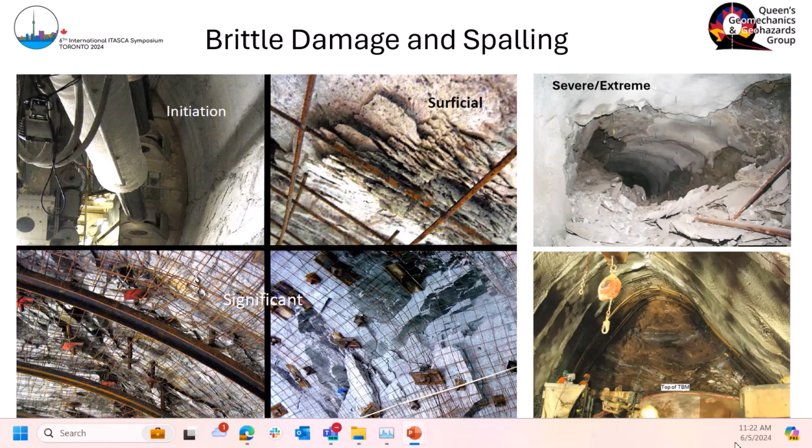But it fundamentally starts with some sort of a way of generating an extension crack in compression. And the classical model for this, way back to Griffith, was the shear flaw, which could move in compression, generating singularities and creating a crack. And we make that big leap from that model to what we see as visible, macroscopic, excavation scale spalling. And how do we get there?

You first obviously have to start at the grain scale. So you can see some scaled pictures here of extension fractures starting from some sort of a shear flaw on the left - it's fairly obvious. In the middle, it starts to cross grains and the actual fractures become longer than the flaws that created them. And then eventually, we sort of skip a step because we don't see it happen, but we can see this excavation scale fracturing.

So the challenge back in the early 90s was how do we sort this out? There was a lot of evidence that it was happening, a lot of lab testing, particularly at the URL in Manitoba and other places, South Africa. But what's the process here?

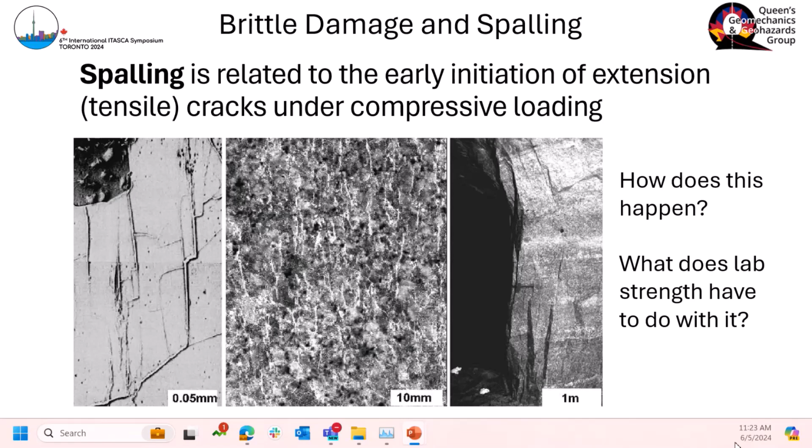Fast forward, we have all sorts of ways of creating what we might call brittle damage models, either with continuum models, simply playing around with the plasticity parameters to fake brittle fracture, or we can go to something more like UDEC, a discrete element model, to create brittle damage propagating through. The yellow in that model, the middle figure, is actually extension or tension, and only when you get farther out into the confined rock mass do you induce shear. We also have complex models to look at interactions between structures, bedding, and brittle fractures in different rock types.

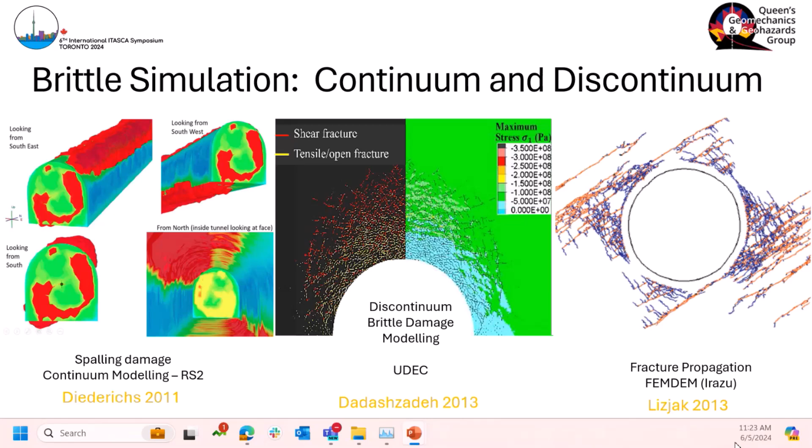These all look great, and they all seem to simulate something. But if you've ever seen Wizard of Oz, you know that the first part and the last part of the movie are in black and white, because things are simple in Kansas. We have time to think and figure out what's actually happening, right? And that's what we used to do, we used to think about the physics of the problem.

But now we're into this... how do we get rid of that? Well, that's going to be a problem. How do we get rid of that thing on the bottom?

Oh well, okay. So now we're into this world of colorful modeling, and the big question is: is it real?

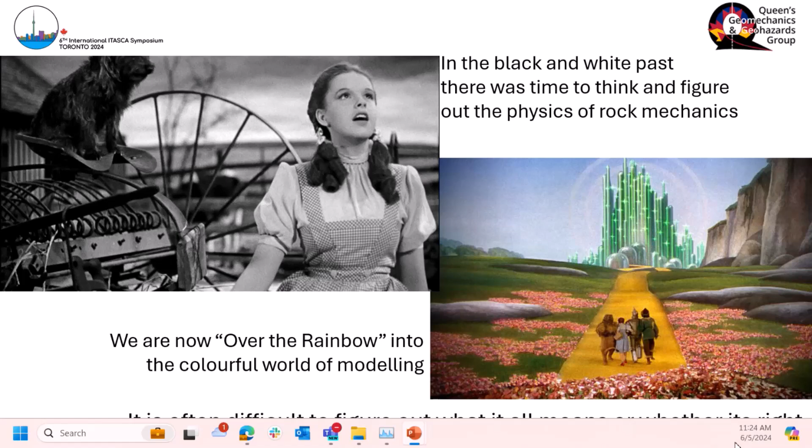So if we go right back to the beginning, Griffith was actually an aircraft engineer trying to figure out why windshields cracked on aircraft, and he came up with the idea of the inherent flaw, both in tension, which was later extended into compression. The idea is that this flaw in tension starts to pull apart, you get singularities at the ends, and they propagate. The longer the crack, the bigger the singularity, the more the crack extends.

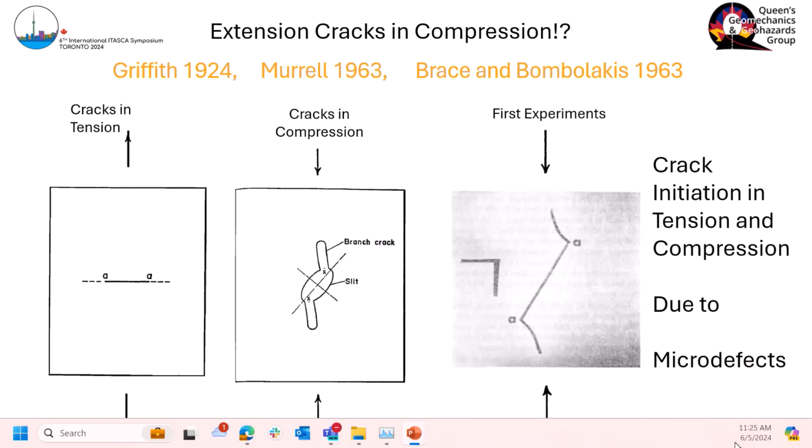So this tension crack would extend. If you think about it in compression, you have to drive some sort of shear mechanism to create those singularities, but the physics is very similar. So in tension, that's going to be very annoying... I don't know if there's any—oh, there we go, okay, got it.

So in tension, I often used to say first crack wins. It's actually quite easy to figure out when damage begins and ends in a tensile situation, because of this idea that the longer the crack, the less stable it is. It's an unstable crack—as soon as you induce the first crack, the system will break.

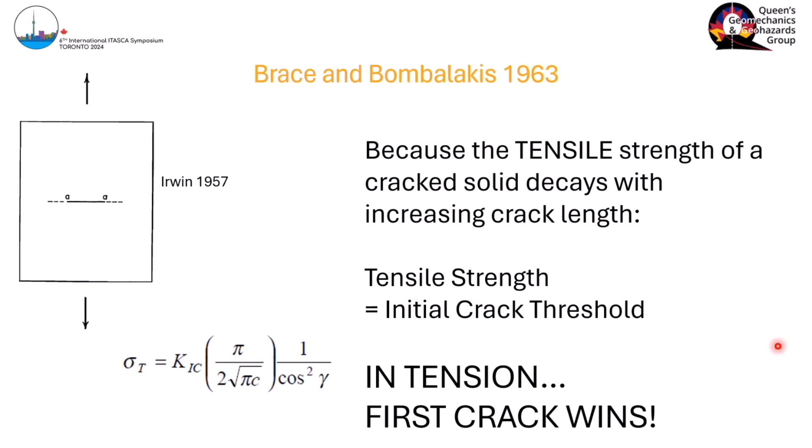Now, following on from that, this shear model was also good in compression to predict when things start. But if you do the math on any of these models, you find that the cracks stop very quickly as soon as they enter, because the world is in compression, sigma 3. You have extension deformation, but the world is still under confinement, and as soon as these cracks go off on their own into the world, they stop pretty quickly. So that's a problem.

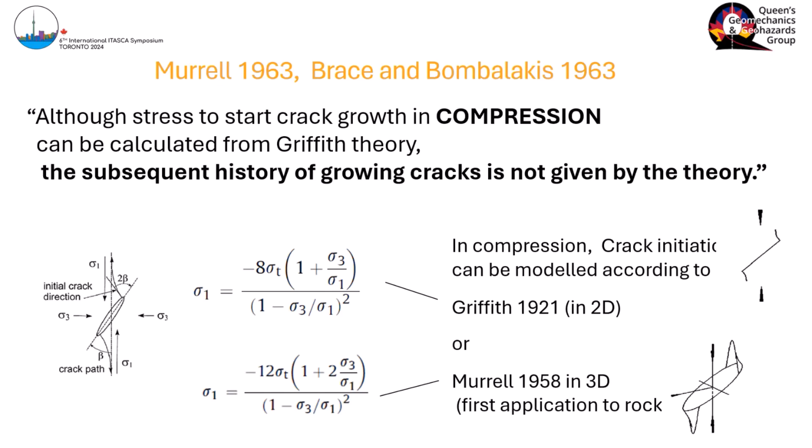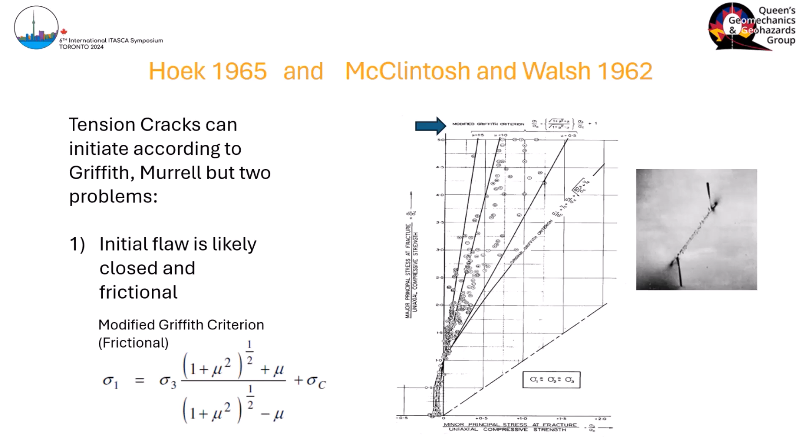What's wrong with this model? Things got even harder when we attached friction to these cracks. The original Griffith crack was open, but of course cracks are closed, so if you introduce friction, things get even harder to break and propagate. It quickly becomes apparent that the only way you can propagate fractures through a confined medium is if these cracks interact. So this whole simple idea of fracture mechanics starts to get very complicated—the first crack is only the beginning in this case.

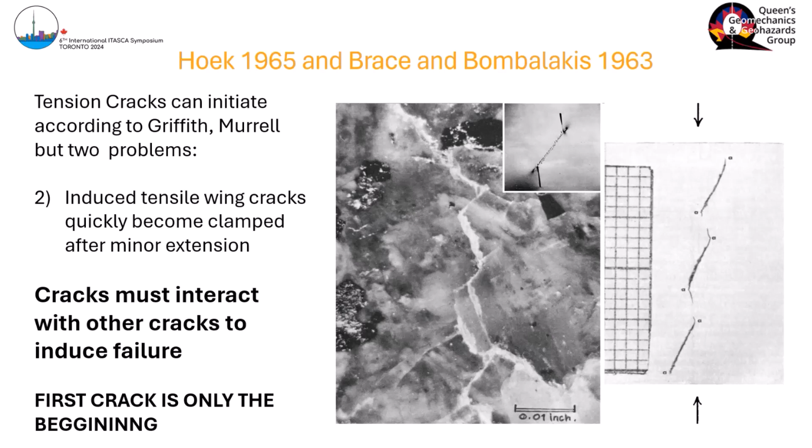But there was some hints of progress. Brace, Paulding, and Scholtz published some great data back in '66, which I think is the last time, showing that the onset of lateral dilation in moderately, reasonably slow loading happened at about half of the UCS, a little less than half the UCS. That's very familiar to most of us now. It had a slope in confining stress, axial stress space, sigma 3, sigma 1, whatever you like, which was non-zero. It's hard to imagine that this was actually frictional, but perhaps it is—you can see that looks very much like if we do lab tests today of any kind, we get the same relationship for the first onset of dilation.

But as we know, in the test it keeps going up to peak. Those cracks can't really fully damage the sample. We can record them through AE, and we can record them through strain measurements.

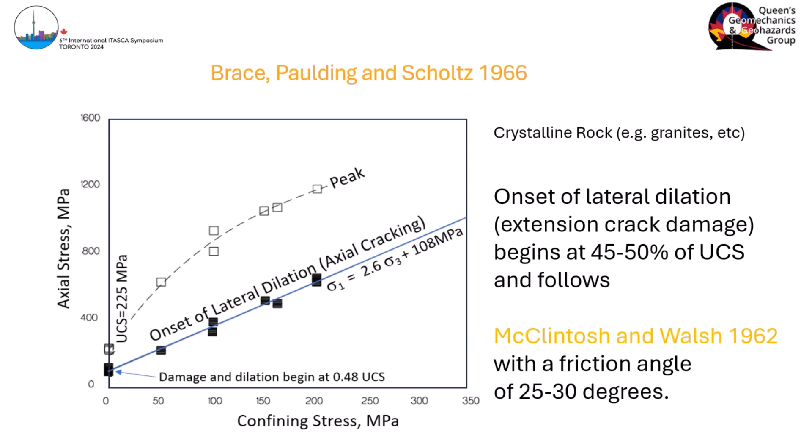Evert Hoek and others did some experiments to show that in fact this idea of crack propagation, which is key to these cracks going anywhere once they start, is extremely sensitive to confining stress—so sensitive, in fact, most models don't really have enough detail and gradients in this regime to help us. But you get the idea: as sigma 3 over sigma 1 drops, or sigma 1 over sigma 3 increases, down to, in this case, sigma 1 over sigma 3 around the 10 to 20 mark, only then do you get cracks propagating any distance beyond their initial dimensions. And that's really critical to how fractures work.

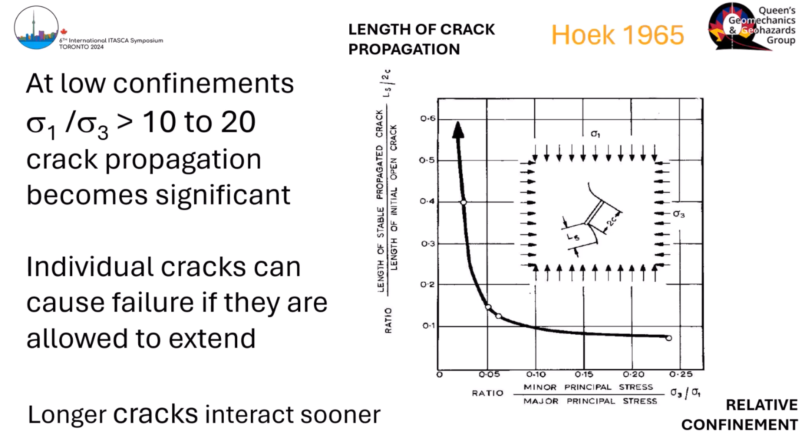This is not the same confinement dependency that was developed by Mogi through lots of triaxial testing. Mogi's line is actually also important. It was an empirical line based on how tests behaved, but if you run it through with reasonable values of Poisson's ratio, you realize this line marks where extension fractures can occur, on the left side of that line and above it. There's no extension strain on the right side, just from elastic theory. And if you have no extension strain at all, everything's moving inwards, you can't create extension cracks, period, even small ones. So this is the dividing line between truly ductile, strain hardening, shearing behavior and brittle behavior.

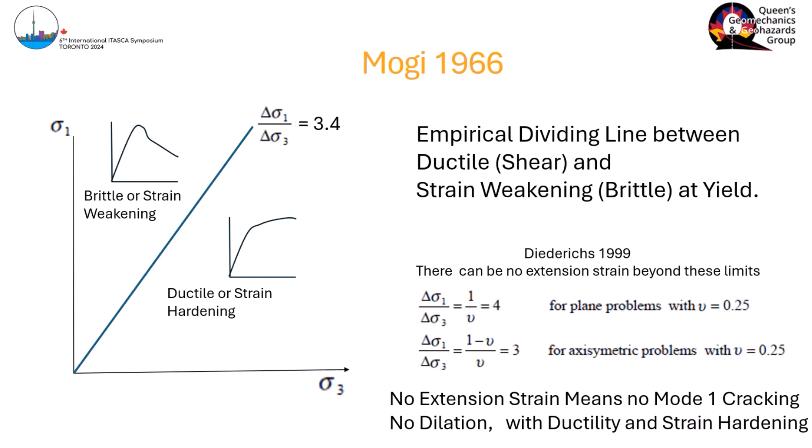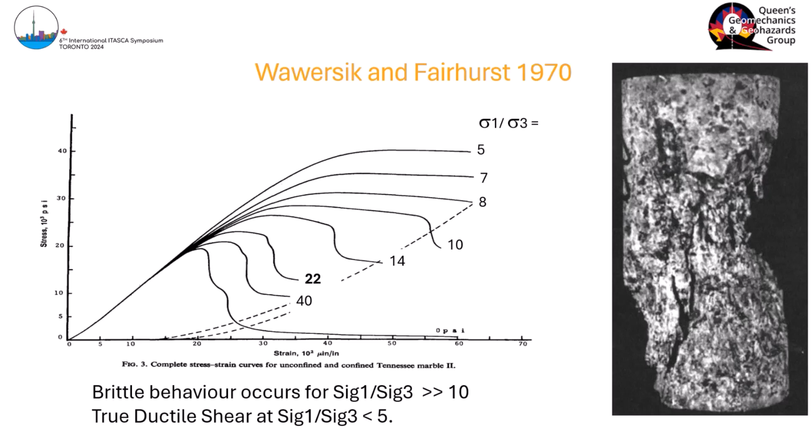So you have these two thresholds, and you can see them here. The Mogi line, if you will, with sigma 1 over sigma 3 less than 5. And this Hoek line, when you start to drop below 10 to 20 in one case, above that 5 line you have purely shear behavior. This is the stuff that soil mechanics is based on. Without these three gentlemen I just mentioned, we'd still be pretending that rock is soil and just making the numbers bigger. But that's the soil behavior. In between, you have extension cracks coalescing to form shear cracks, and then below that, you actually have this brittle fracturing. That lets us divide the world nicely up into true tension, spalling, tension cracks leading to what we'll call shear zones, and then pure shear past Mogi.

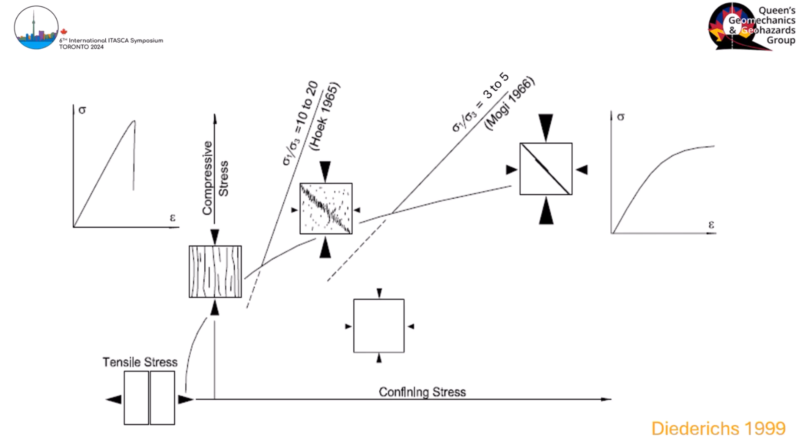So this is the beginning of understanding the world of fracture, and thanks to a lot of good work in the past.

Dr. Fairhurst doesn't seem to be here this morning. Had some nice drinks with him the other night. We talked about this.

You can see here in these wonderful graphics from this paper that the fractures begin on the external edges of this, in this case, the cylinder. The center is actually functioning in that shear mode throughout, and then eventually it just gets too much and you have final fracture. So this is one of the more significant figures in rock mechanics, in my opinion, this process that now we take for granted.

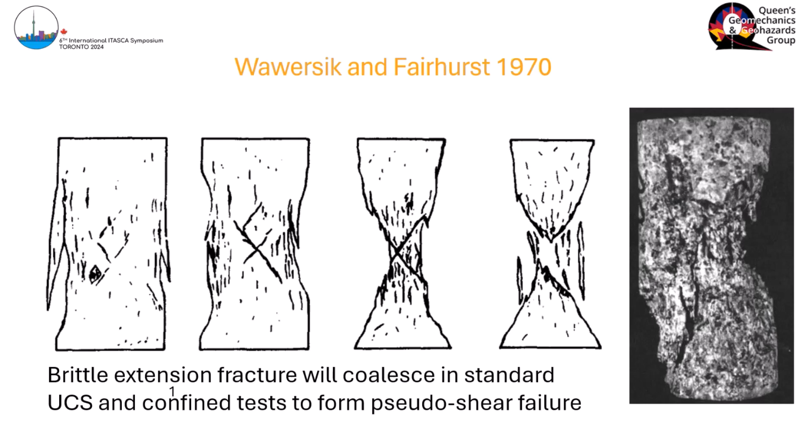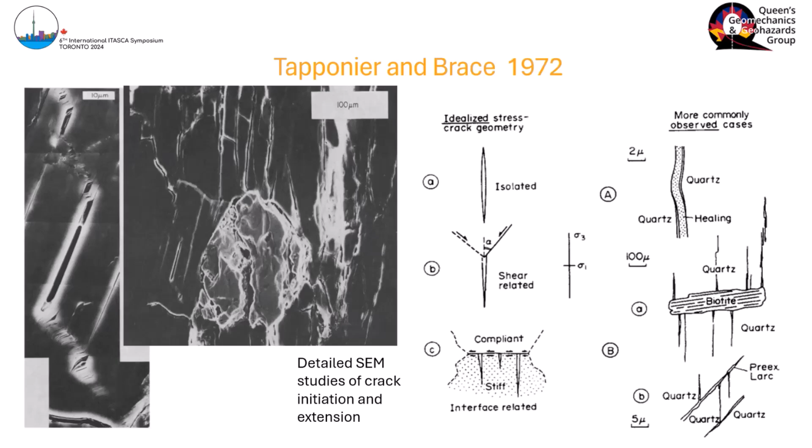This is a great paper that showed that this idea of shear cracking leading to tensile extension didn't need a shear crack. Anything that causes any modulus contrast, any sort of compliance issue, indentation within the sample, anything that can create disturbance in the force, as it were, can lead to extension cracks. So heterogeneity is key. In the same paper, they identified, I don't know if this is the first time, it's the first time I found it, they identified this onset of dilatancy in a test, confined or unconfined.

At some point, the linear behavior, the linear axial stress-strain behavior starts to go nonlinear. And then, of course, you have failure in post-peak. They describe it this way: you have initiation from multiple sources, short isolated cracks. Those cracks cross grain boundaries and start to interact. And then finally, it becomes so much that you have a macroscopic shear process. So this, a long time ago, with physical reasoning, was the basis.

Okay, I'm frozen. Yep, I am frozen. Wait. Maybe just—oh, what the heck? Hang on, let me just try this one. Oh, it's because I'm—nope, no idea. Hello, okay, here we go. Next. Nope, didn't work? Nope, wait. Can I just get out? A sec? Here we go. Use arrows. Okay, thanks. Is that going to work? Yeah.

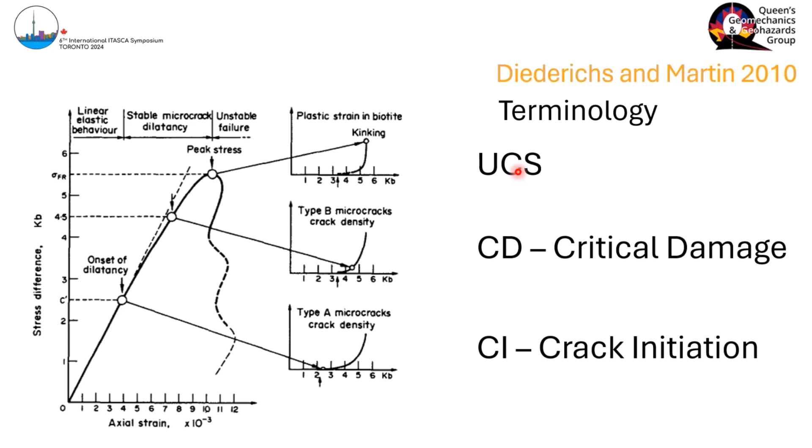So coming back to this idea of these thresholds, which are now sort of ubiquitous, and we test for them and have lots of discussion about them. It's basically the first point where you start to get extension cracks within a compressive field. Those then extend. Once they extend beyond the grain boundaries in a crystalline rock, at least, for example, they start to control their own destiny and they start to interact with other cracks. And that's when things really get interesting. And in some cases, that's when your sample fails.

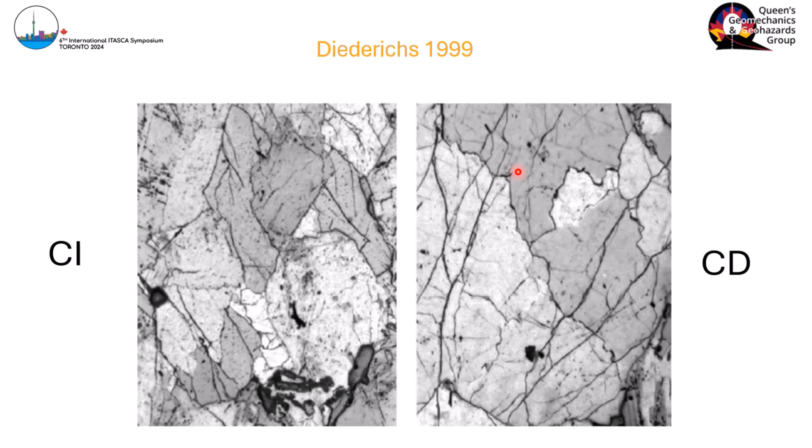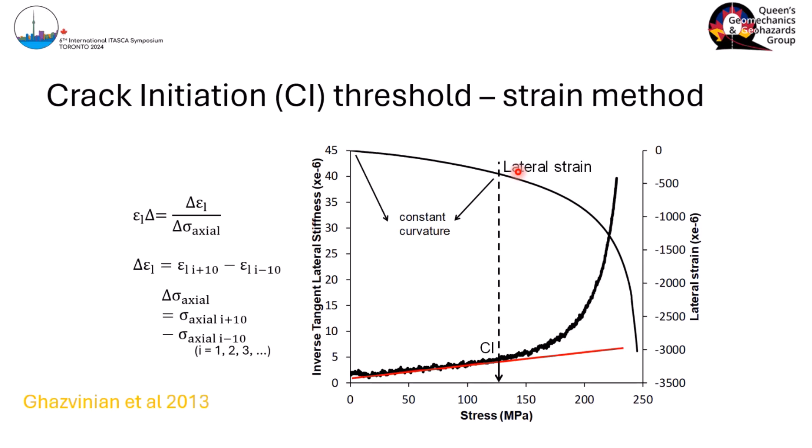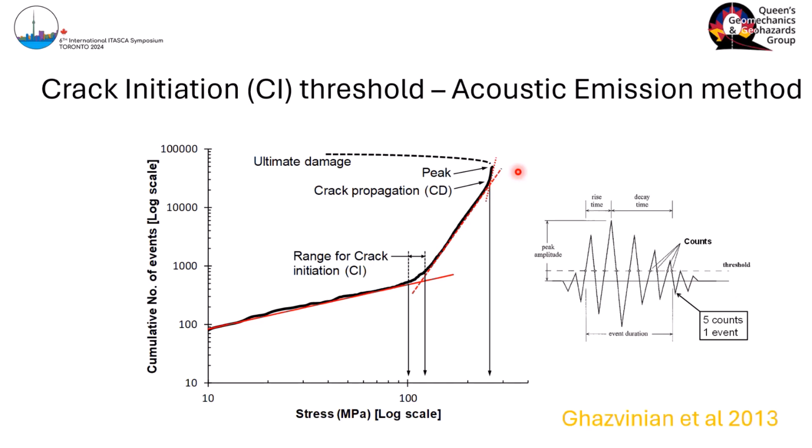That's usually the best you can do in situ in any sort of term beyond a few minutes. After that, anything that happens after CD is really a function of the testing or the constraints. And we can test for these things. I won't get into details here, but with all sorts of acoustic and strain sensors and extensometers and whatever, we can look for deviations in the lateral and axial strains to try to identify these thresholds, which are part of the strength model. Acoustic emissions have been very successful. So these are just ways we can get inputs into models, and we have some empirical basis for all of this. This is a work that just appears everywhere.

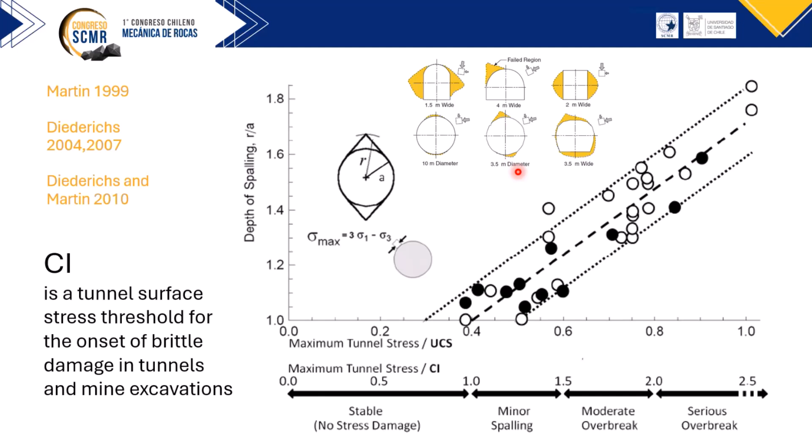These are a bunch of case studies done in the 90s out of the GRC in Laurentian, but the case studies are international. These are cases where people went into where rock had failed and excavated everything they could back to the truly intact rock. So this is kind of a maximum damage, and you can see it begins at about 40% of the UCS, but more importantly, it begins at CI for most rock masses. So this is empirical evidence, and you can track the damage, going to the point of: something interesting is happening here that doesn't follow the normal rules of plastic modeling and so on.

So modeling history that helped this all happen, of course. This is not the first program developed to analyze stresses, but it's probably the first one that people could use. It's an elegant boundary element stress model, about 4 pages in the back of Hoek and Brown, 1980. Of course, he used pen plots. That computer there is actually what I started working on in my research.

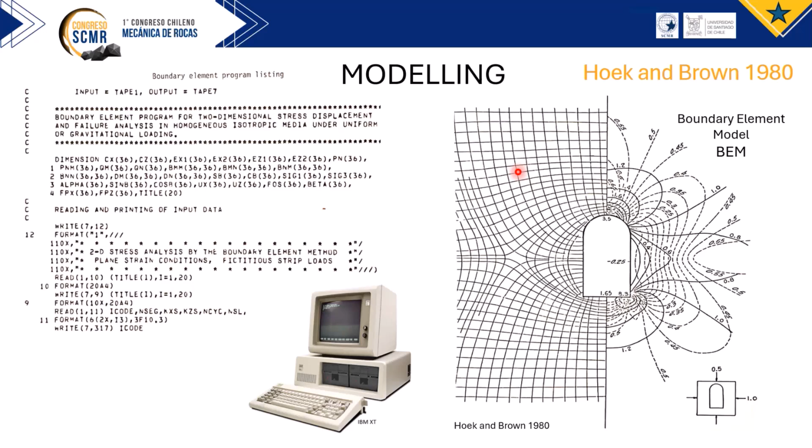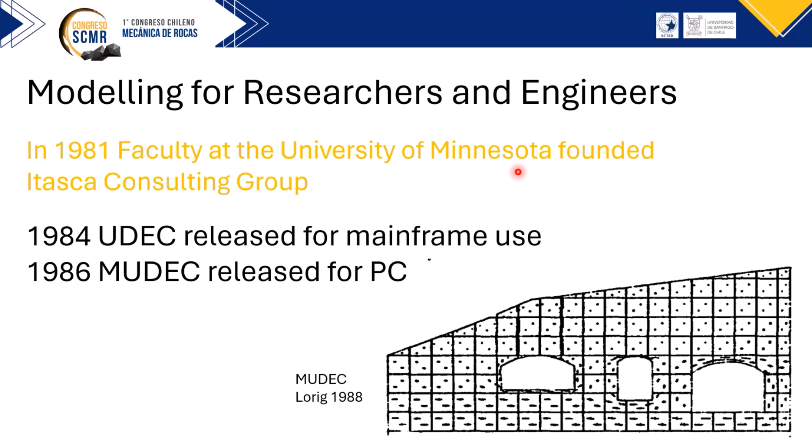And of course, around the mid to late 80s, Itasca started releasing commercial packages. I don't know if I've got these dates right, but I remember the floppy disk of MUDEC showing up in the lab, which then became UDEC later. UDEC was around as a mainframe program. FLAC and 3DEC came a little bit later.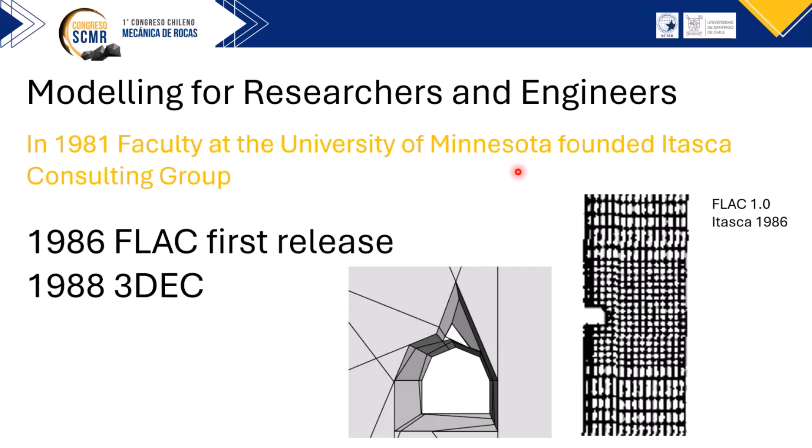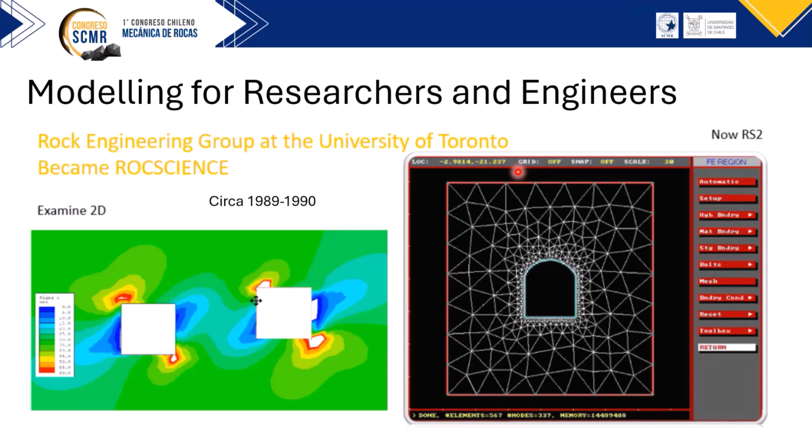This was the beginning of usable models for geomechanics and rock mechanics, and even soil mechanics, really, coupled with work at U of T happening around the same time, bringing boundary elements and finite elements to a point where normal people could use them. This was a big boon for graduate students, because you no longer had to develop the program as a grad student, you could just launch right into your research.

This is another program, 3D boundary elements, that was around in the early 90s, and I used it with data from Landriault and Oliver to analyze this important case history when Creighton was changing. They couldn't mine with cut and fill mining anymore, they had to change because the stresses were too high. So this was the first time they did sort of VRM block stoping, and they were analyzing the stresses and taking very careful measurements through boreholes and observations of damage as they progressed the sequence.

When you analyze that, the black squares are yielded rock masses, and the white are apparently intact rock. What's kind of neat is if you overlay GSI models or intact models, even Griffith, it doesn't seem to work. But if you want to separate this data, you end up with a couple of choices. We originally started saying sigma 1 minus sigma 3 equals a constant, half UCS. That's not quite right and causes problems. The reality is it's about 50% of UCS plus a slope of about 1.5 of sigma 3. And this seemed to be pretty neat.

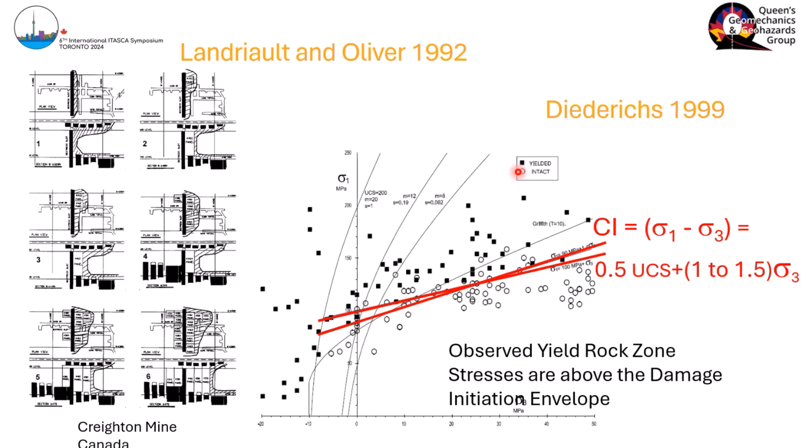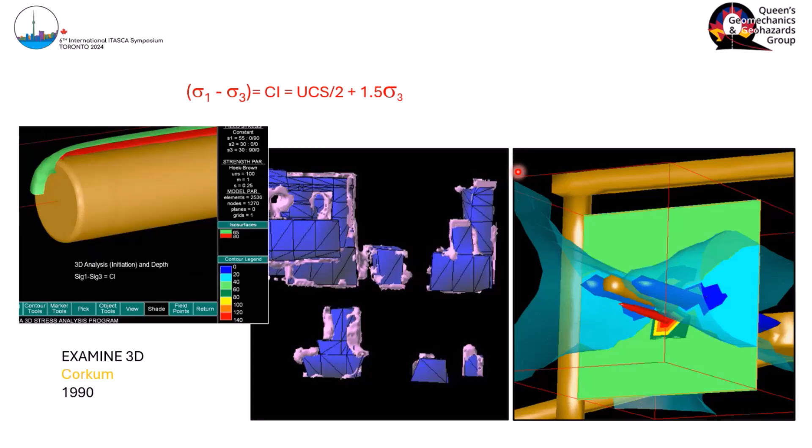What this allowed us to do in elastic modeling was really exploit that 3D world to try to understand where we could expect this sort of brittle damage, from the URL to the Brunswick mine, to this tunnel in Europe. And we got pretty good at it. It wasn't telling us anything about mechanics, but it was telling us what we should expect and where we should expect this kind of behavior.

This is the Gotthard TBM. That's Dr. Marlene Villeneuve, she's a professor at Leoben now in Austria. But again, simple model, simple.

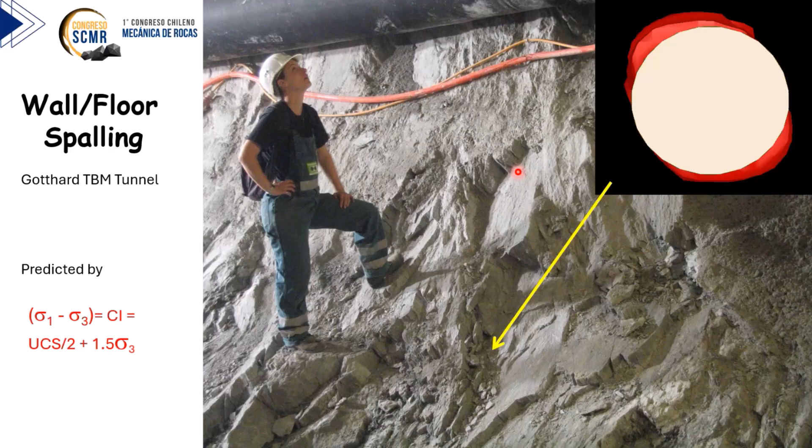So what do we know? Well, wall strength seems to be around 40 to 50% UCS. That corresponds to what we see in the lab as the onset of dilation. We know failure modes initiate through extension fractures. It seems to be a low friction process, and I say friction in the general sense of confinement-dependent strength. It may or may not be friction or something else - I have a lot of ideas, but that would take another talk. We know that rock under low confinement fails by spalling, and if you increase the confinement, you eventually get to shear bands.

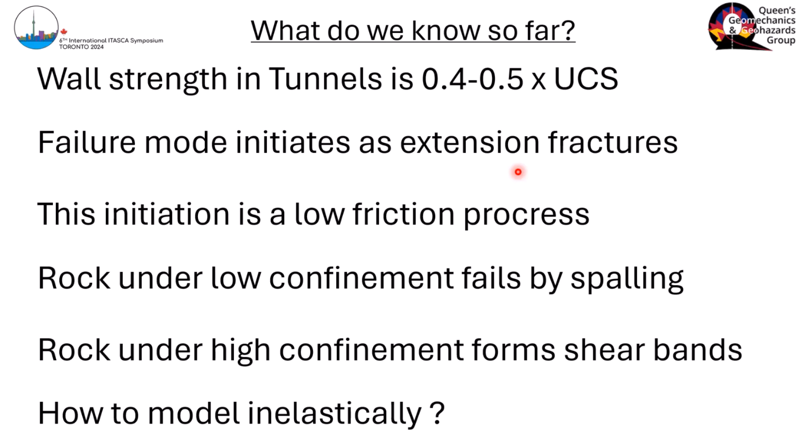Great. How do we model this inelastically with some sort of idea of what's really happening? So at this point in the 90s, this was sort of empirical. How do we tackle this? So you start to think about this idea of trying to create extension in compression, and you eventually get to this point.

All my friends were having kids at this point, and you have those annoying child gates that expand into the stairwell. I was always thinking about that, and then of course along comes PFC, and I'm like, aha.

You can just see graphically what I'm talking about, this idea of inducing extension even in a compressive field. So extension strain within a compressive field is really how PFC models brittle fracture.

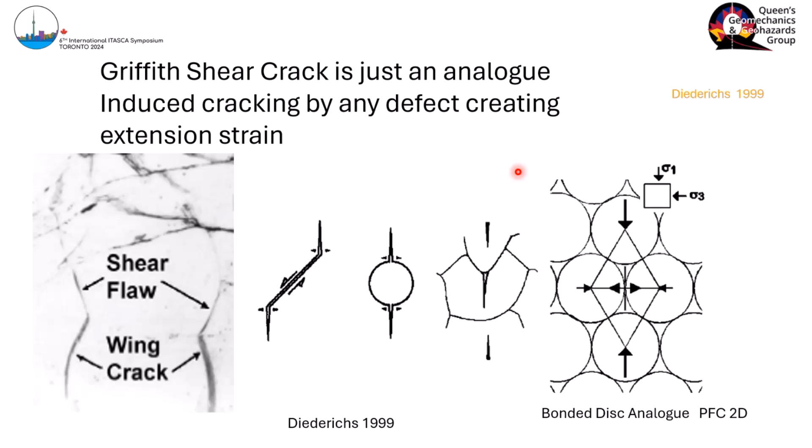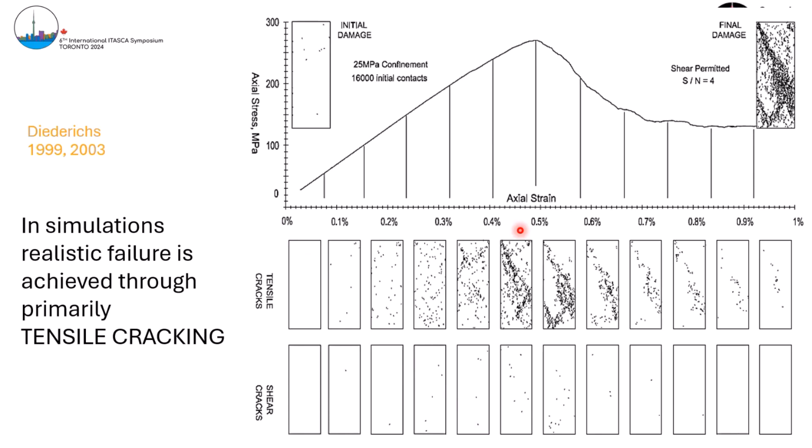I took that in the early days, fairly simple. You see a lot of versions of this, but it was eye-opening at the time, that you could create totally realistic fractures, or totally realistic yielded samples, which appear to be shearing at the end of the day, almost entirely from tension cracks. These are axial, more or less pseudo-axial tension cracks within PFC, particles pulling apart, very few shear cracks except right at peak. This idea that most fractures could be entirely induced by the onset of these microfractures.

Even in compression, although as you start to increase the compression, shear starts to become more important. So this is damage evolution within a sample, starting to look great. Makes a lot of sense.

But what is yield in a rock? For the longest time, rock mechanics was the only discipline that didn't talk about yield. We always talked about UCS, which is essentially ultimate strength. No engineer designs for ultimate strength, but we never talked about yield.

So yield in a brittle rock, this was again PFC with a little bit of FISH code at that time, detecting when two balls are talking to each other, or two discs, or two cracks. When are they within range of each other so that they're actually interacting?

You can see that at CI, you have mostly distributed cracks happening randomly through the sample. But at some point, the density of cracks becomes enough that statistically they're guaranteed to start interacting, and at that point they start to take over. You can see that middle curve ramping up very quickly once the cracks start to talk to each other.

So if we can get enough cracks, we can fail a sample through extension. But that's not always what we see in situ. We see a tunnel with a few very long persistent cracks going from top to bottom.

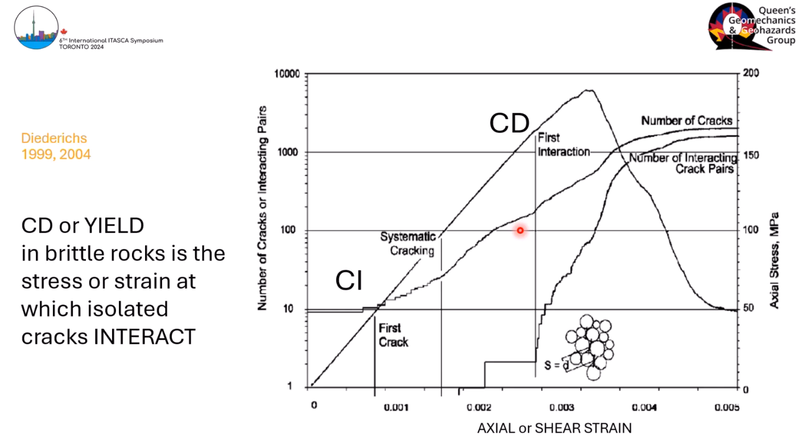How does that work? PFC did at this point, this was without the parallel bonds and everything, PFC wasn't great at this point in crack propagation. It was great at crack accumulation. So it was kind of a test bed to study that phenomenon. We had to invoke fracture mechanics to take it the next step.

Many people have looked at this idea that at extremely low confinements, cracks will propagate, not uncontrollably, but almost. And that tendency goes away as soon as you get very small amounts of confinement. That's globally in a continuum.

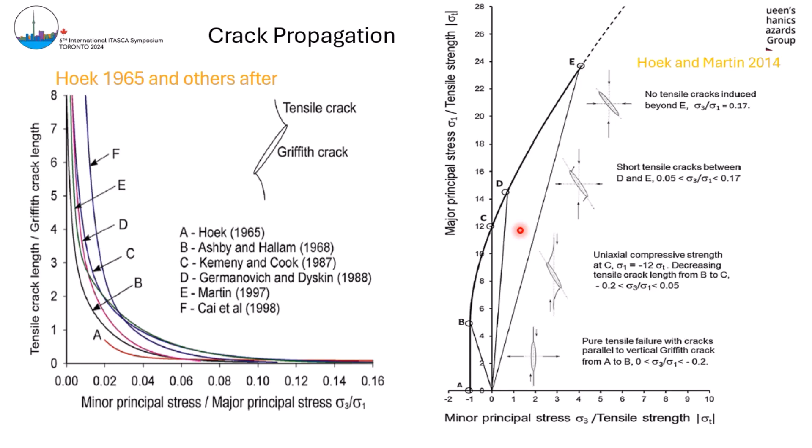This is again PFC letting you look at the stress fields locally. You can see that even certainly at UCS, certainly at an unconfined state, and also in a confined state, there are fairly large islands of tension in your model, or at least stresses less than zero. Anywhere in those zones of low confinement, you can have crack propagation as well as accumulation.

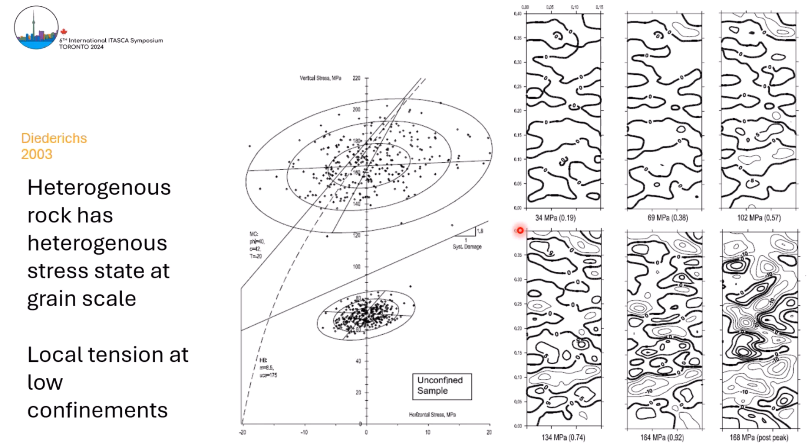Now you're starting to cook with gas, right? If you do a whole pile of runs, and look at the top percentage, this is spatial extent of local tension. At around, this is almost increasing logarithmically, you can see that around sigma 1 over sigma 3 of 20, 25, we're up to 10, and if you continue this, it basically envelops the sample.

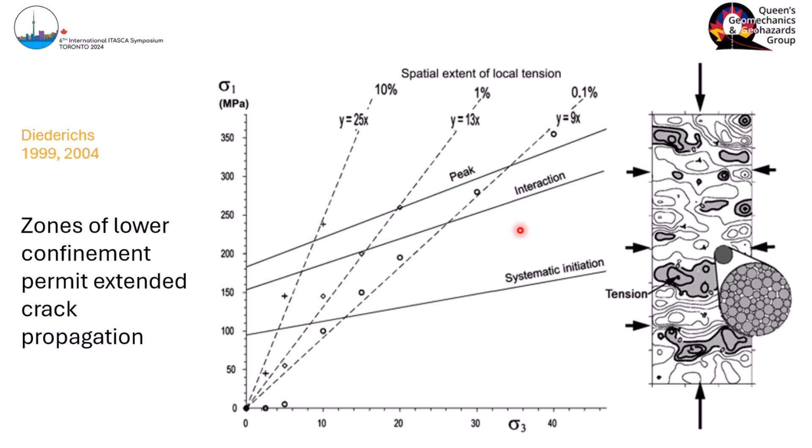Meaning, if you're here in this zone, you not only have accumulation of cracking, but you also have extension of the cracks, propagation of larger cracks happening, which then can have a much higher probability of interacting and or just extending. That all summed up led to this figure here, which is where we divided the world into tension, spalling, and everything else. This is the so-called S-shaped curve, now used fairly ubiquitously in rock mechanics.

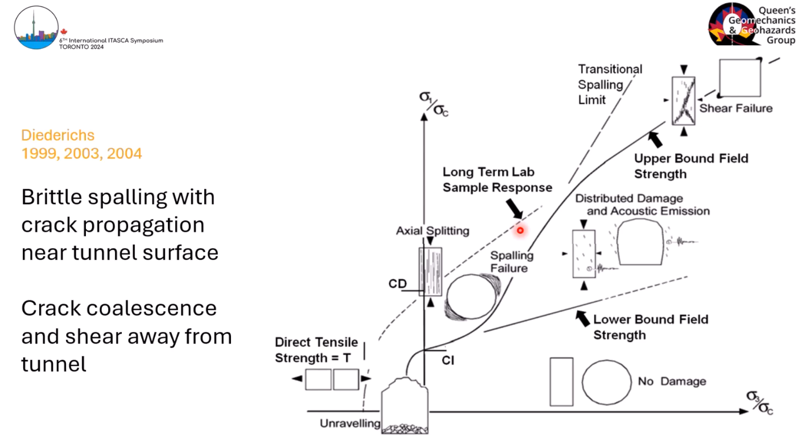Not necessarily as an S-shaped curve, because that's really hard, but we needed to go from here to find a way of putting this into a model. The first attempt for me was to fake it in RS2 finite elements. I had to get Brent Corkum to change the dialog box to let me put a higher friction angle for residual than peak, because they'd locked you out. This idea that you have a high cohesive, low friction peak, that's the fracture mechanics. Then when that yields, the cohesion is lost, but the confinement dependency increases dramatically.

And this was a neat way of getting the ductile brittle behavior, as you can see, simply through the transition. Now, the only flaw here is that the hardening rule is not great, so this all sort of happens very quickly in the model, and there are some numerical issues that happen occasionally.

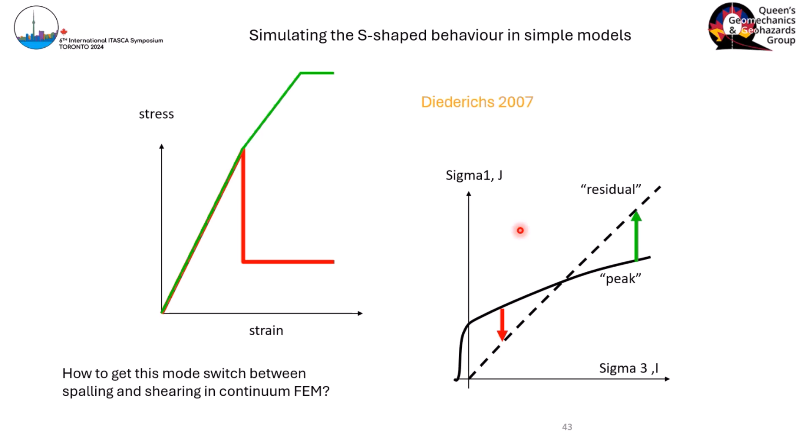Around about the same time, some people, including Hadjiabdomajid, who was my office mate, we were working on these things in parallel. He was working with the CWFS model. It wasn't called that at the time, but it was the ability to put friction, cohesion, tension, and even dilation into a table so that it evolved with plastic strain. Fabulous. These two models are essentially just different ways of doing the same thing.

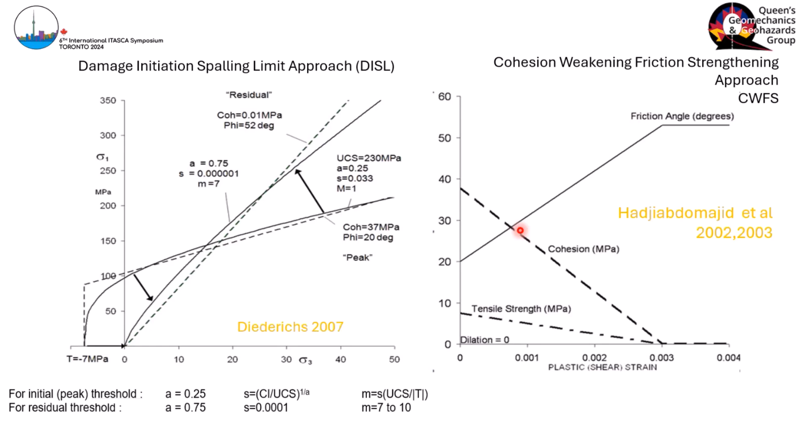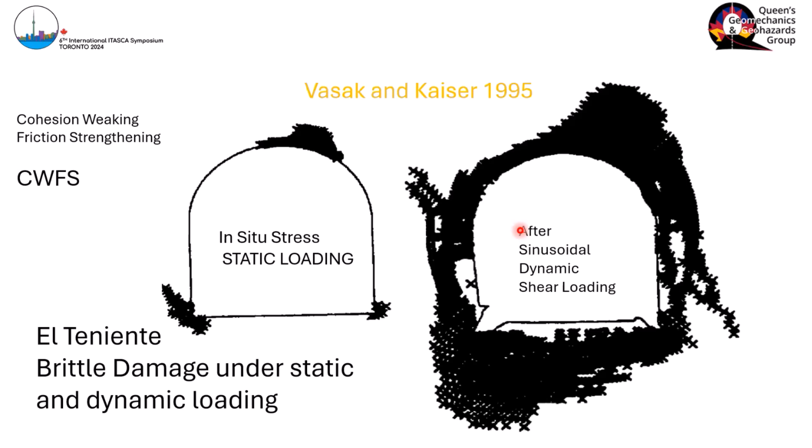So salt at low confinements—think of salt as a creeping material—but at very low confinements, it behaves just like everything else. And of course, these models were great at modeling things we knew a lot about.

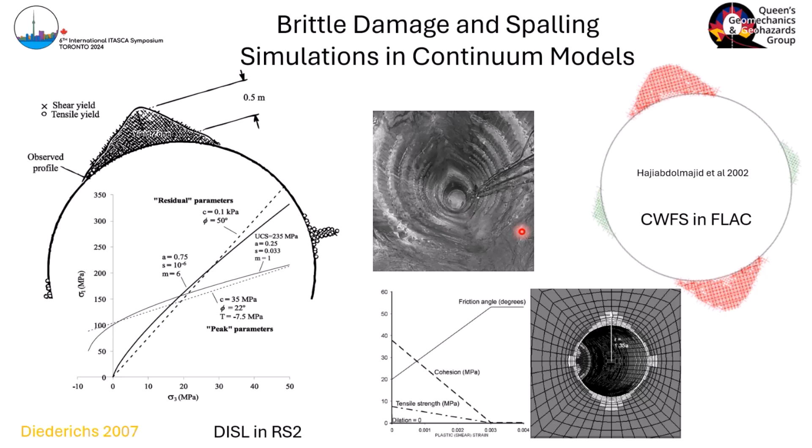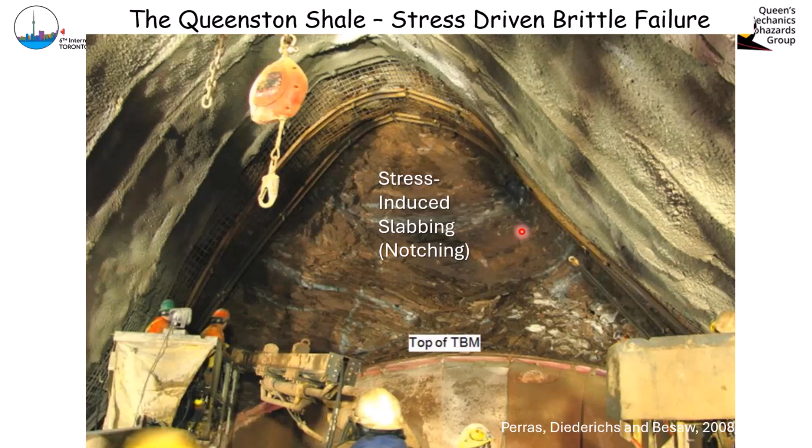We could simulate the URL with either the DISL model in RS2 or the CWFS model in FLAC. We could even do a pretty good job when things got really hairy, like this Niagara Tunnel. Again, it's a bedded material, but the beds are not really discrete. But once the fracturing starts, the beds interact and really drive the spalling. Both models were very successful in predicting the actual extent of that.

And I've used this, and many people have used this now with RS2 in this case, to do real simulations and real analysis of what's happening in tunnels, and to predict behavior and even design.

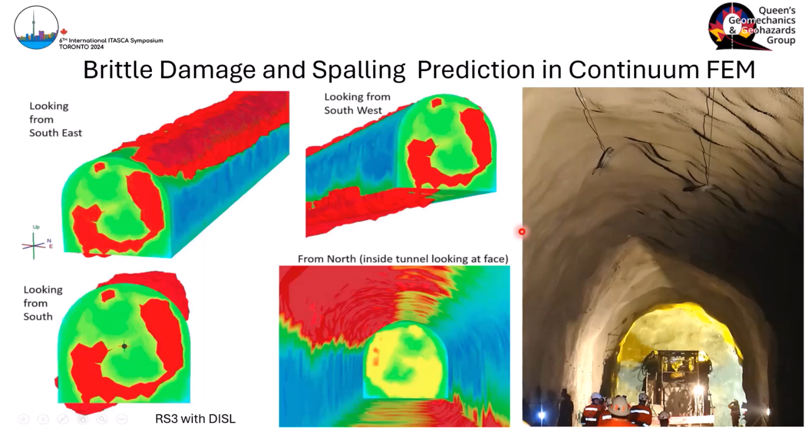The caveat here is that now when you get into support design, you can model this brittle behavior. And if you use GSI, this looks very different, just for your interest. GSI is based on shearing. This is based on spalling, and I won't show the other, but you can see the support trying to intercept that spalling deformation and deal with the deformations that are coming from the inelastic process.

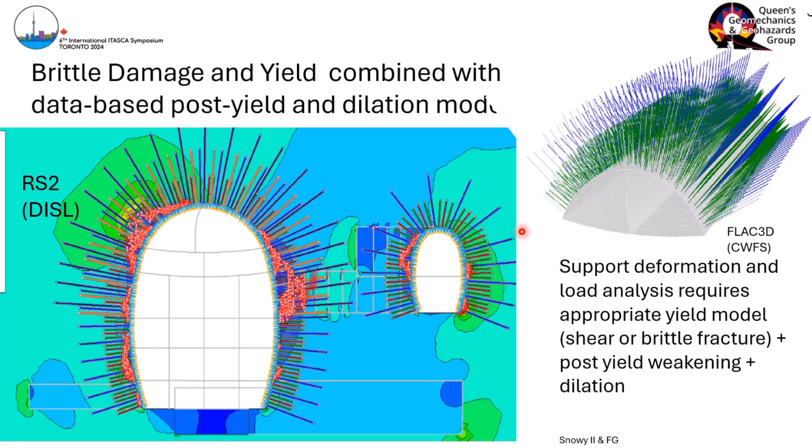Now, here's the rub. Without some sort of useful dilation law, this gets really hard to make sense of, or actually be real. And it comes back to that question: we're simulating something that looks real, but it's not entirely real. So we have to think about dilation.

What happens after yield? Gabe Walton's work was very much on the brittle side here, looking at how dilation evolves with strain, and it's not always what you think. It does increase very rapidly at first and then starts to decay.

Some very useful work from Loren Lorig and Varona, just trying to understand what do we do about a rock mass. So somewhere in between here is brittle rock dilation. Fedalberto in the front there is working with me on that, trying to sort that out.

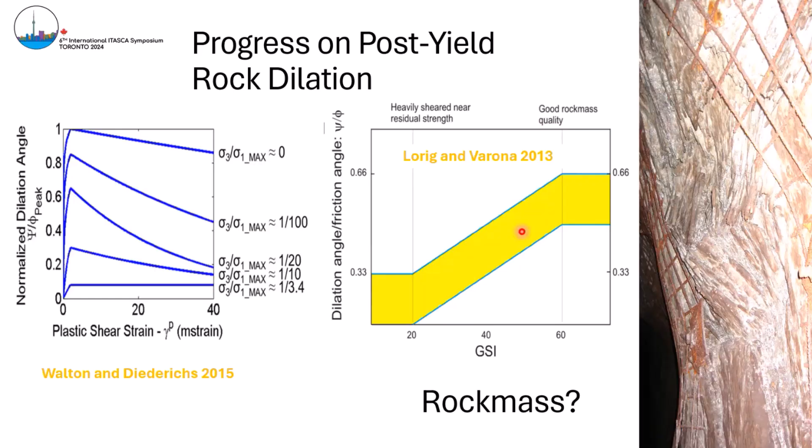Moving on, this was another more significant figure taken back in the 90s by Brad Simser at one of the mines up in Sudbury.

What you're seeing there is a single joint that normally, if you look, you just ignore. It's at a high angle to the excavation. What difference can it make? But you can see the spalling fractures, which would normally come around and terminate in the excavation, get sucked over in a very interesting way by this soft shear structure.

And what eventually happens, because you're supporting that, is it just walks up that joint and becomes—this was a 10,000 ton failure, which we're standing under, probably regretting that decision. And of course, structurally induced bursting at El Teniente on the right.

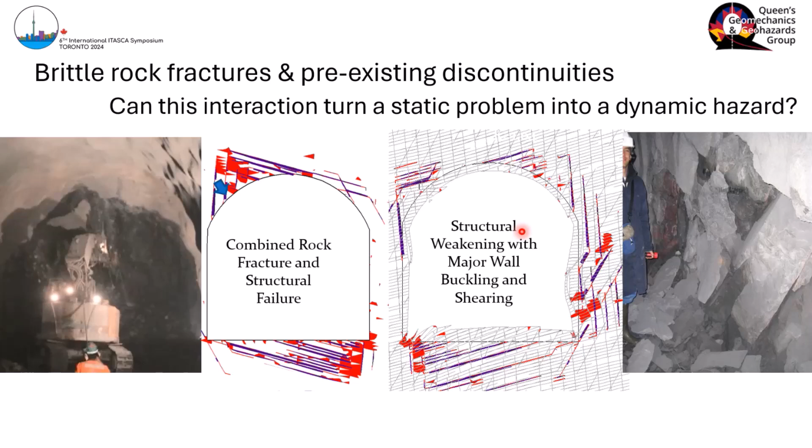So you can use these simple continuum models with pseudo-continuum structure, joint elements, to look at that interaction and come up with some very interesting conclusions. It was the only way to explain this idea of brittle spalling interacting with, in this case, volcanic bedding, and the genesis of these rock bursts. These were at 300 meters. Rock bursts have no business being at 300 meters, except for that interaction.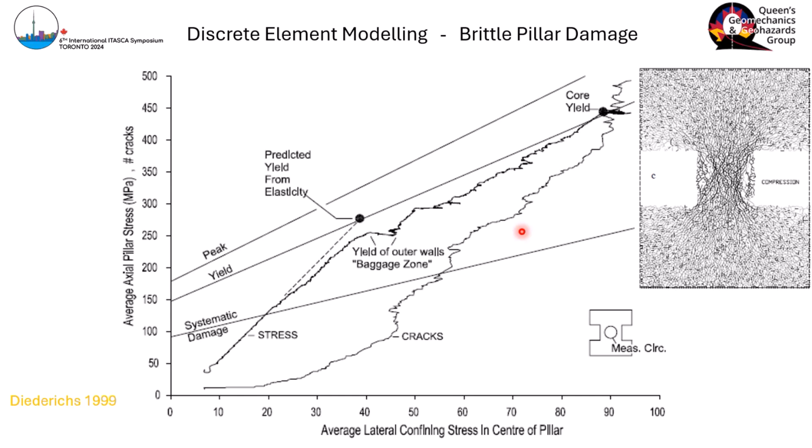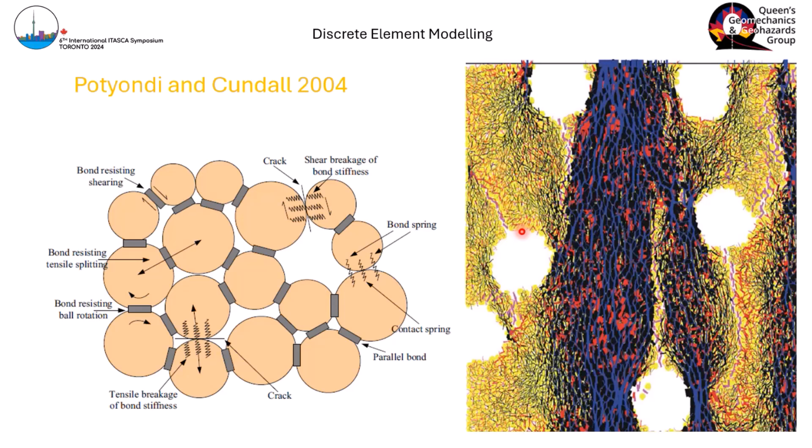And then, of course, PFC grew a lot after this paper with the contact models, famous lithophysal analysis - that was one of my favorite words for a while. Showing more and more elements, we could get smaller and smaller cracks forming and do more and more realistic simulations.

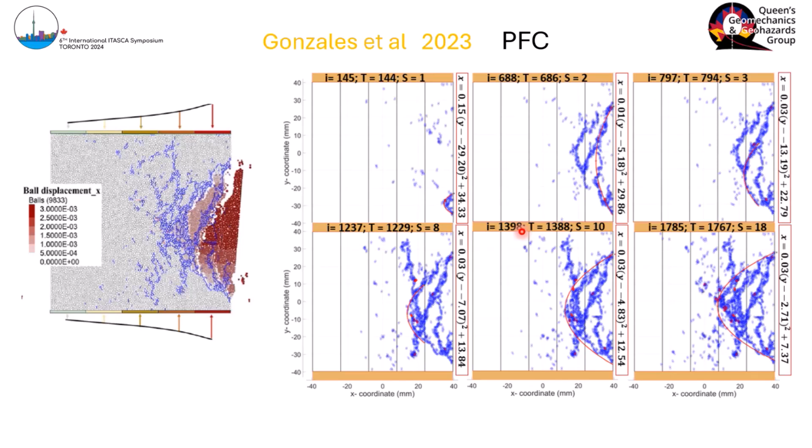UDEC, same thing - we get these pretty models. We can look at stress flow, we can create block models. This again is UDEC, and we can let those blocks fracture.

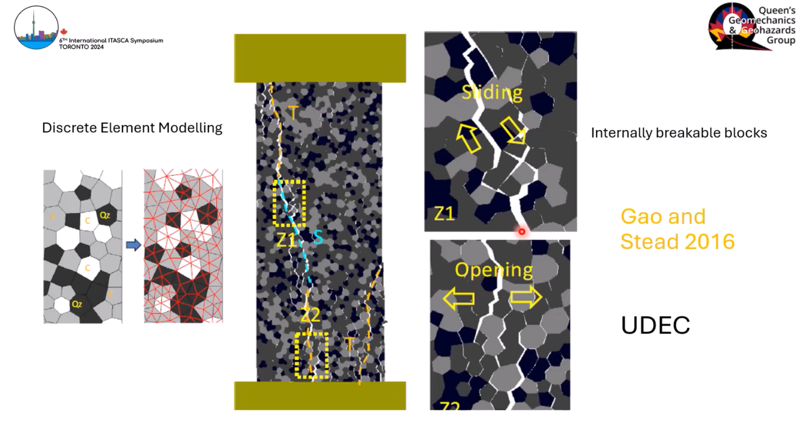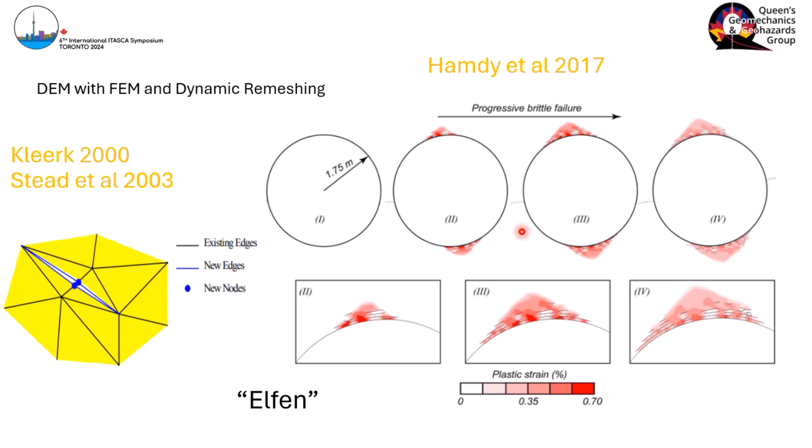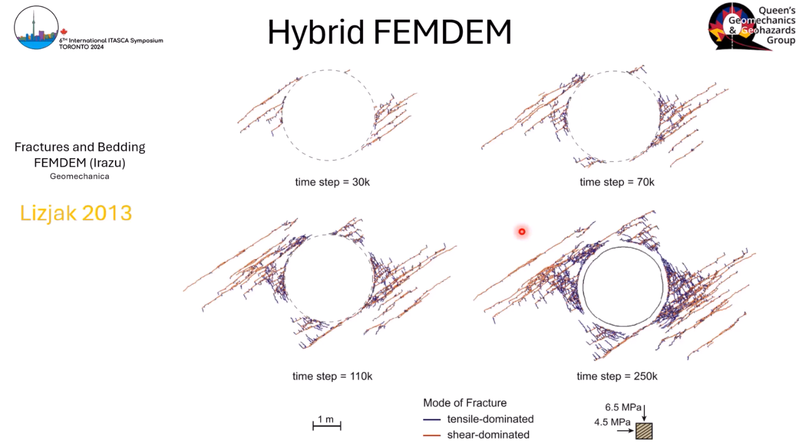This was some work out of this program called Elfen, where we had this bonded block model, but the blocks could actually remesh and fracture themselves. This was a very advanced program, hugely computationally intensive, so it doesn't get a lot of use in rock mechanics, but you see the idea. The folks over at Geomechanica just made their triangles a lot smaller and got similar results - really interesting work, looks great.

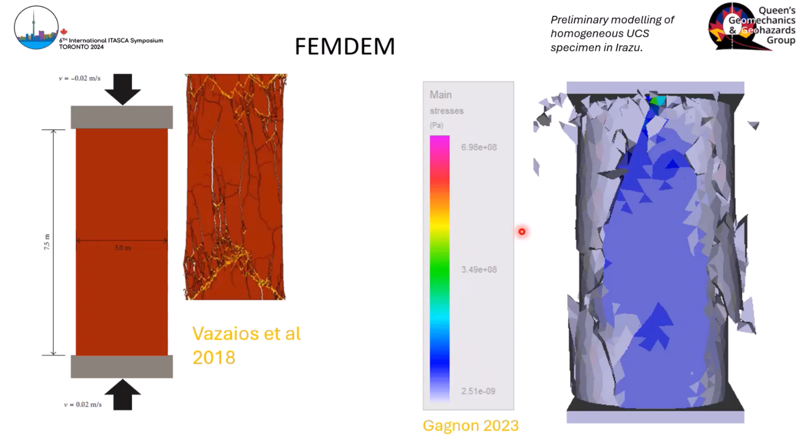And you can do the same thing with this type of model at the sample scale. At the rock mass scale, you can look at the interactions between brittle fracture and - you can't see them here, but over on the right where it starts to get more intense - you can see existing structure.

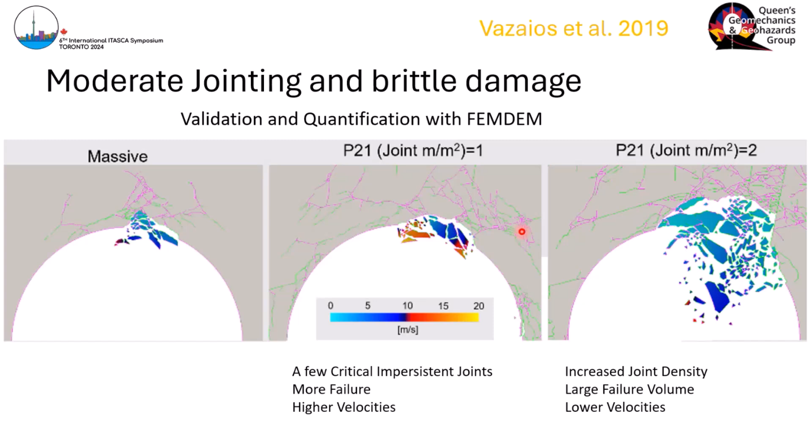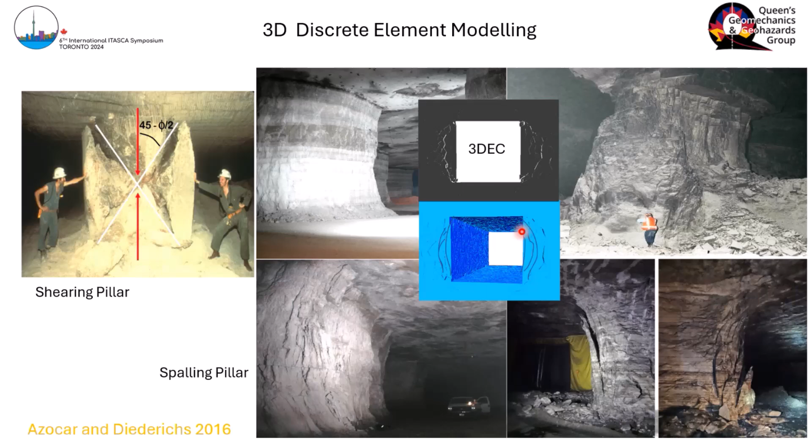Really nice paper here, that's at this conference, kind of on the same vein - if you want to check it out by, I'm not going to pronounce that first name, but my good friend Navid, looking at this same idea of generating spalling fractures and seeing what happens.

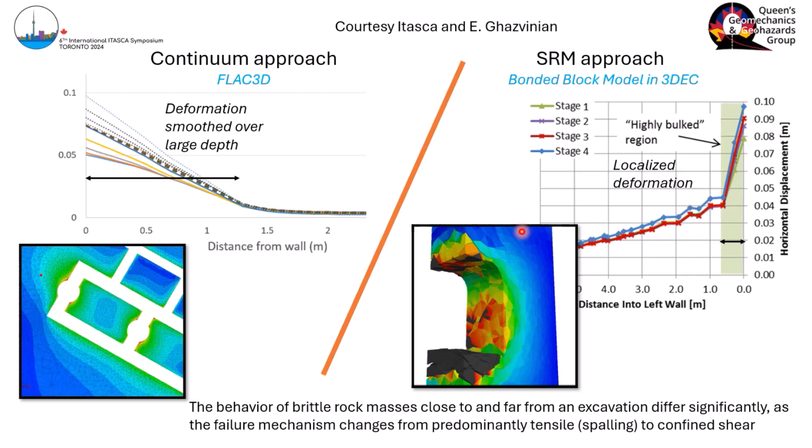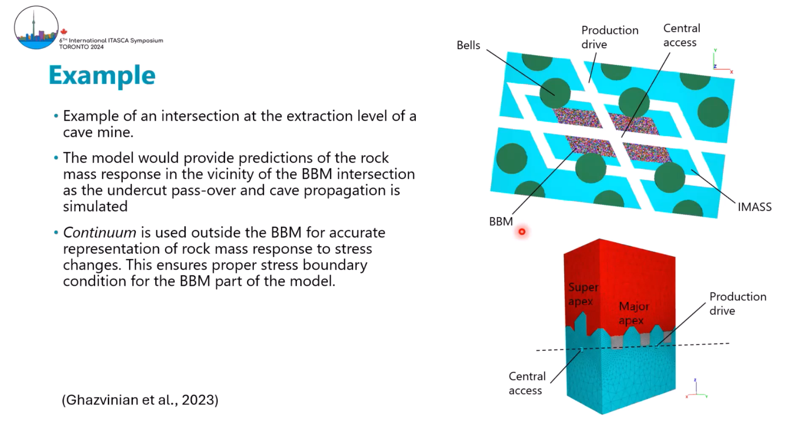I think where we're at today is probably this, which is courtesy of Ehsan Ghazvinian from Itasca. They're integrating these bonded block models into a larger model surrounded by a continuum, and the continuum takes care of the evolving boundary conditions, while the bonded block model looks at internal fracturing and allows for fracture generation, dilation, everything else. You can see the rough outlines just by squiggles of the bonded block model and the supported drift intersection there, and the outer part is just responding to that.

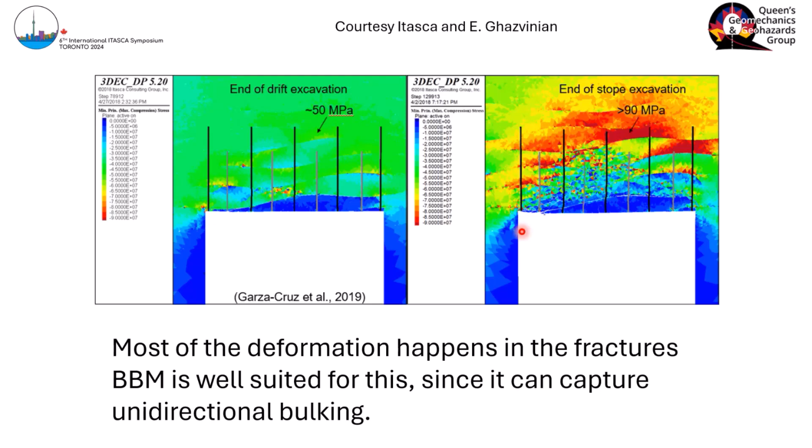And then finally, we can do some support design - we get the propagation, we get the depth, and we get the bulking or the dilation. Now the question is: is it right? Well, then we have to monitor and try to figure out if this great answer is actually the right answer. So I'll just leave this to anybody who's still doing research.

There's so much we still need to know. I would say we're still not capturing the true fracture extension and interaction processes here, but maybe what we're doing is good enough for now. But there's lots more to do, and this will be somewhere.

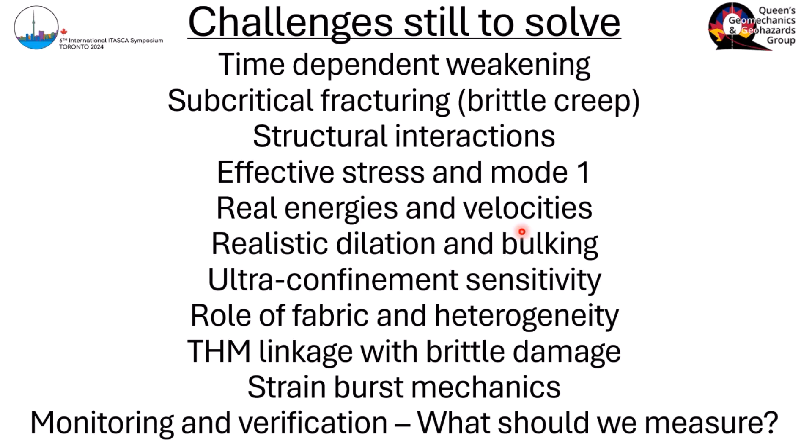So just to finish up - this colorful world of Oz is super cool. It looks real, feels real, you wish it was real, but just don't forget to visit Kansas every now and then, and get back to some basics to figure out if it means anything.